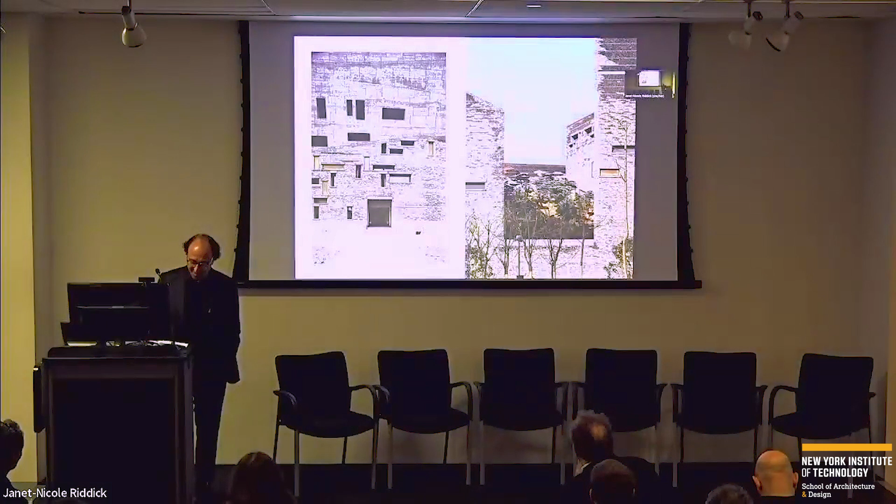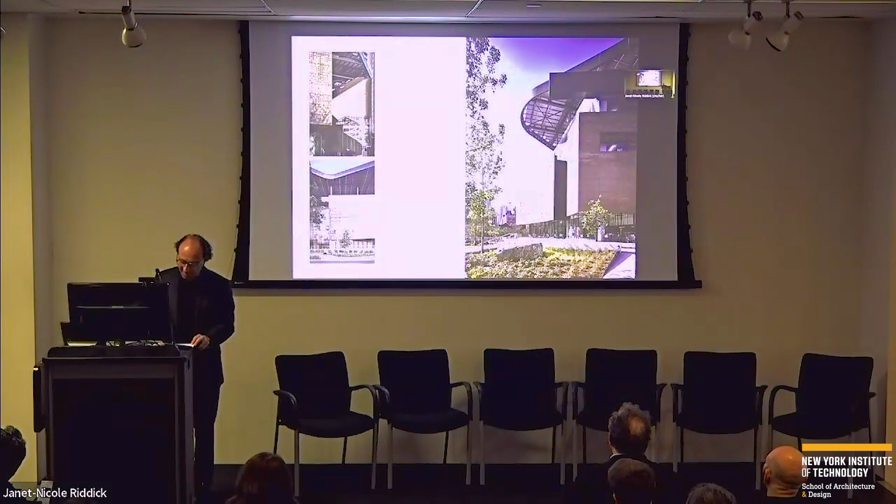We're grateful for Jesse Reiser to be here today, and also Scott Lee to present 2 of the projects. Here's the second of those projects, the Bloomberg Center in Cornell Tech. It's a building I've probably taken the most photos of, of any building in New York, because I live in Roosevelt Island and spend a lot of time walking past it, admiring the coloration and different sorts of conditions of light. I'm sure, Scott, you'll be talking about that. We're close to the... There we are.

Just a quote from a book review that was written by Katharine Logan in the Architectural Record: if you could invite 21 of today's most brilliant architects to dinner, who would they be? And if you seated each luminary between a pair of architecture students primed on one of the architect's most significant works, what conversations might you overhear? Short of actually holding that imaginary gathering, Beyond the Envelope is as close as most of us will get. Beyond the Envelope represents a significant contribution of first-hand accounts of some of the century's more compelling architecture, its ideas and processes, and it goes on.

And instead of that imaginary dinner party, consider this book as an invitation to take your lunch to a park or order a glass of red at your neighborhood haunt. I think of it more as a whiskey book, personally. Yeah. You can order a glass of red and dip into a rich conversation.

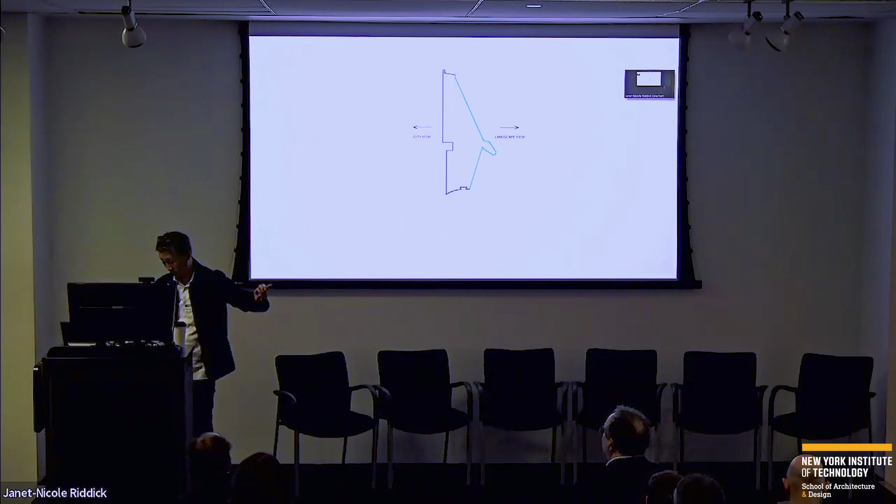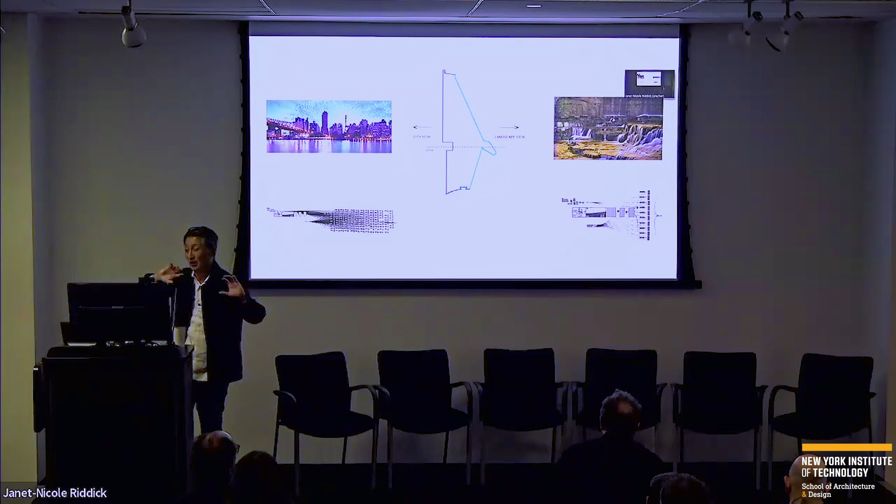The city view, we took an image of Manhattan as you see it from the actual location. The landscape view is, Ithaca is gorgeous, right? Ithaca is all about the creeks. It's about the little waterfalls. We took an image of the gorges. We translated that into a black and white image. Then the scripting command then alternated that to codify the panel.

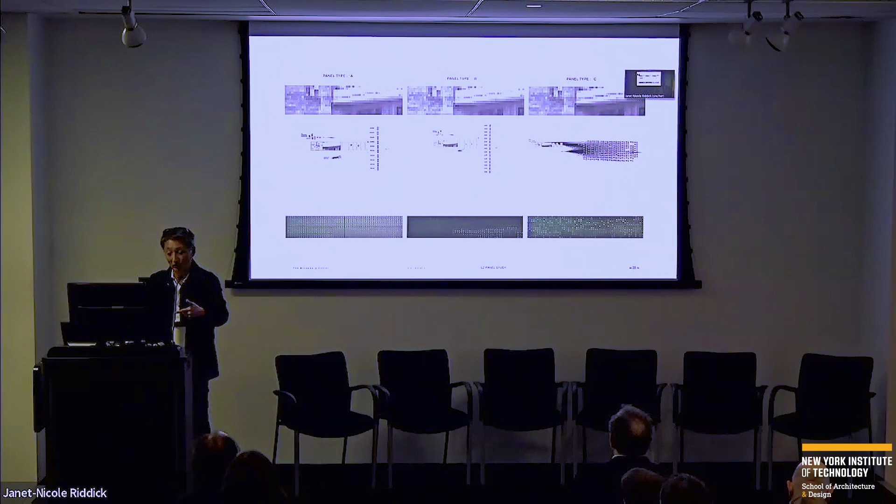And essentially, it's a pixelation. Depending on the grayscale, it will tilt the little pixel and then turn it into the panel, okay? So you cannot see the image literally, but if you had the photo and you look at it, you could see the patterns of the image in grayscale with the relationship with the actual pixelation, okay?

This is at Zahner. These two gentlemen here are Zahner project managers working through the series of different mockups. You can see how much the different photographs affect the grain. So this was the Ithaca photo side. This was the New York City side. And we took one that was sort of in between because we wanted to see the quality of the intensity. Is it going to really kind of wig you out when you see all these patterns? We wanted to prove that. So there were a lot of these mockups.

Looking at daylighting, kind of monitoring how light behaves. We kind of figured it out. We really felt good about it. And then we said, okay, how do you build that at scale? We just need like 6,000 panels now, right? Like, how do we actually do that? So it was all hands on deck on using a robot to actually begin to turn all of those little things.

So the wonderful 20-second story on this one was Zahner, which is the metal fabricator in Kansas City. They were trying to figure out, we definitely need a robot. We can't do this manually, obviously. You know what? We have this old welding robot arm that nobody uses. It's collecting dust. It's in a closet. Let's fire that baby up. Let's print a 3D printed head that's kind of like a nozzle. Let's get the old dog and retrain him and maybe see what he's going to do.

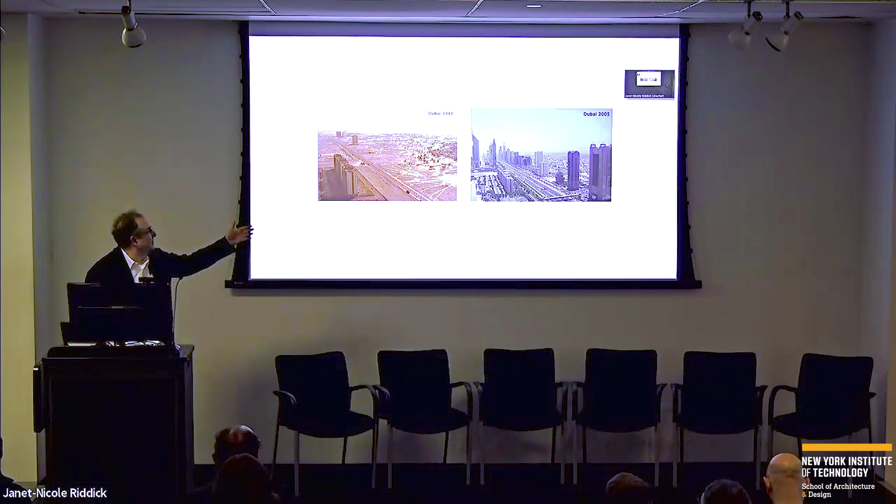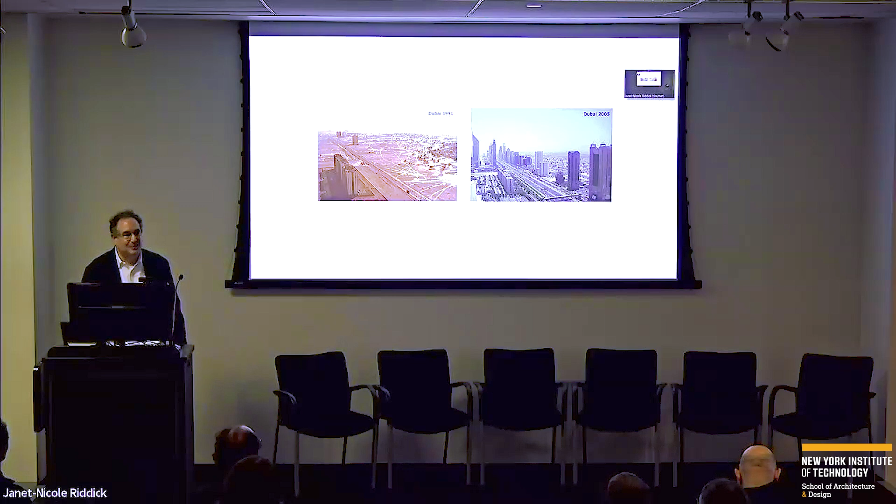We had the opportunity to become involved in a major competition in Dubai for a new kind of business center in a place called Business Bay. And this, again, is kind of old, but you can see the almost tabula rasa condition in 91 and where Dubai was in 2005. I apologize, I don't have contemporary images, so this is like 20 years ago.

But anyway, there were enormous numbers of master plans generated for the various sub-cities within Dubai. This is Business Bay. I think it was one of the large kind of British engineering companies that did the master plan for this.

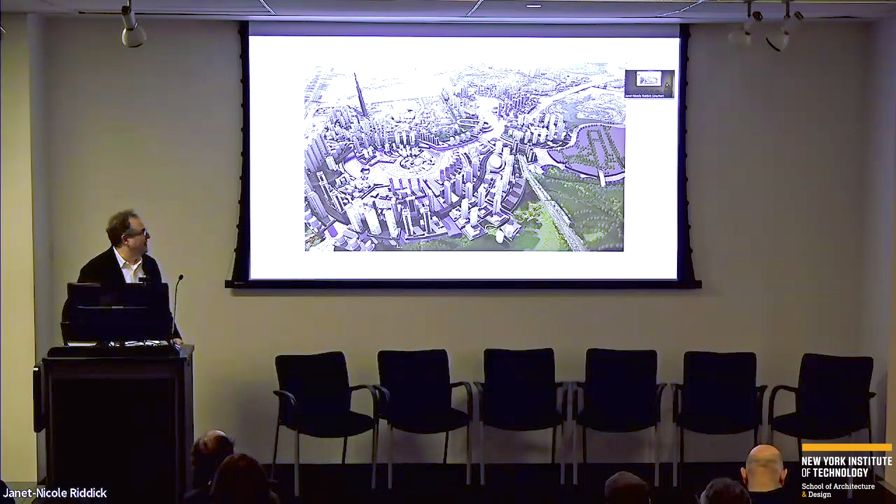And a young developer who worked with a company called Dubai Properties, Shahab Lutfi, created this competition to look at, you see, within the center of the circle, they wanted a kind of central building for Business Bay for stock trading and various other kinds of office functions. And so that was the theme of the competition that got us involved in the project.

When we got to the site, this is what we encountered. That little red flag was to be the center of the circle. So just an amazing sort of contrast between the ambitions of the renderings versus the state of the site. Of course, that's changed. OMA was involved. They were among the people

competing. And they already kind of developed a sort of propaganda campaign prior to the submission of the works. And I guess they included work that they thought the other architects competing would have produced. So for us, they didn't really know. So it was the United Architects, our collaborative tower, but then Thom Mayne and various other architects, Zaha, to kind of show what he would probably consider to be somewhat exuberant and maybe ridiculous formalism that was going on at the time.

And then these were ultimately the projects submitted: the OMA tower, which was a kind of sliver that rotated on a central axis. Zaha Hadid's dancing towers, which ultimately won the competition. Morphosis's Burj Al Maidan, which Thom sent me much later. He was very reluctant to show me that.

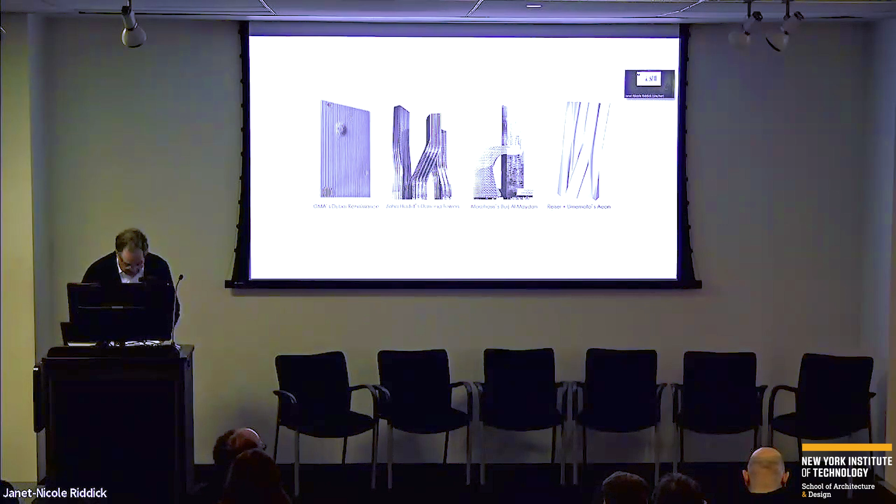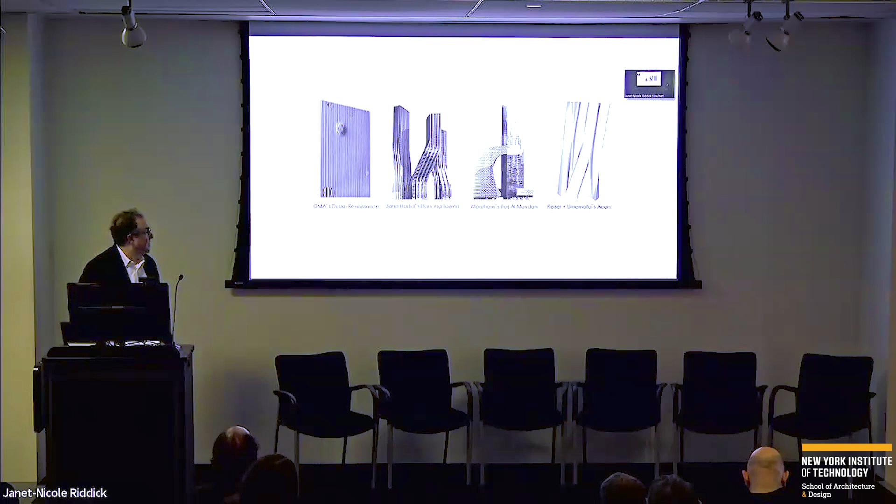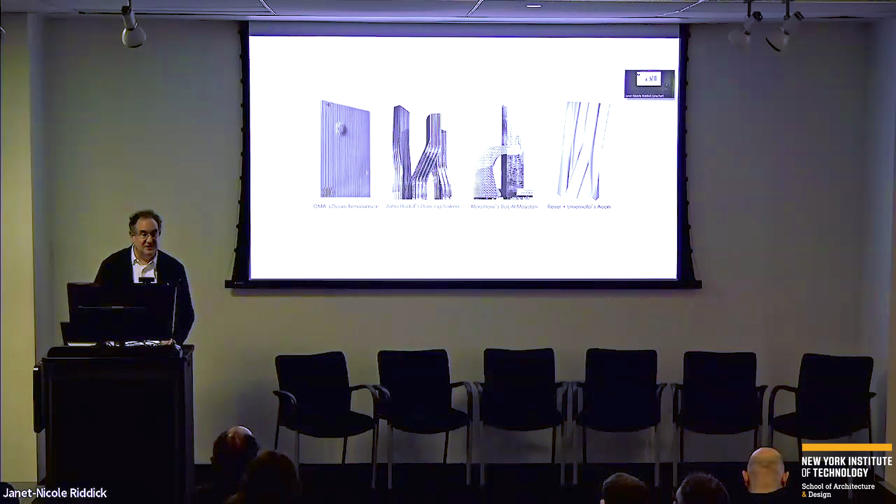And then our project. This was for an 84-story mixed-use tower. So half of it would be office, half residential. And it was to contain all of these civic functions as well as a stock exchange. So it was a huge 84-story project. We didn't win. Shahab Lutfi was impressed with our scheme, and he at that point was about to start his own development company. So he asked us to submit a design for his first project.

And what he wanted, in effect, he loved the formal development of the 84-story tower, and then asked us somehow to incorporate that kind of development in a 22-story mixed-use building. So we went through, I believe, at least 16 iterations, which really didn't work. The project was mixed use, so at the beginning of this project, residential and office at the base, and then it would break into separate sub towers for residential.

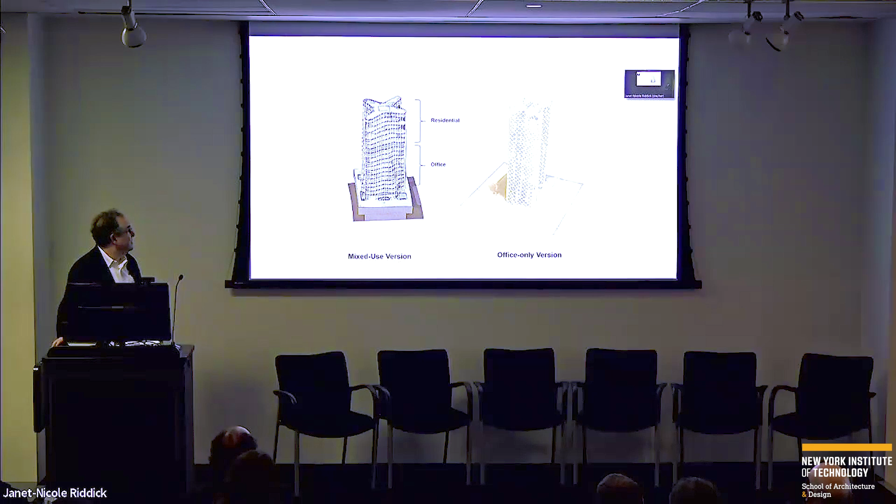We finally did a first concentrated iteration for the mixed-use version with a curtain wall, and it started as a more amorphic base, maybe like an Aalto vase, and then developed into a soft cruciform. Ultimately, Shahab jettisoned the residential component, and we went entirely to office only. We, at the same time, could convince Shahab that those overly developed forms from the 84-story building could simply not work.

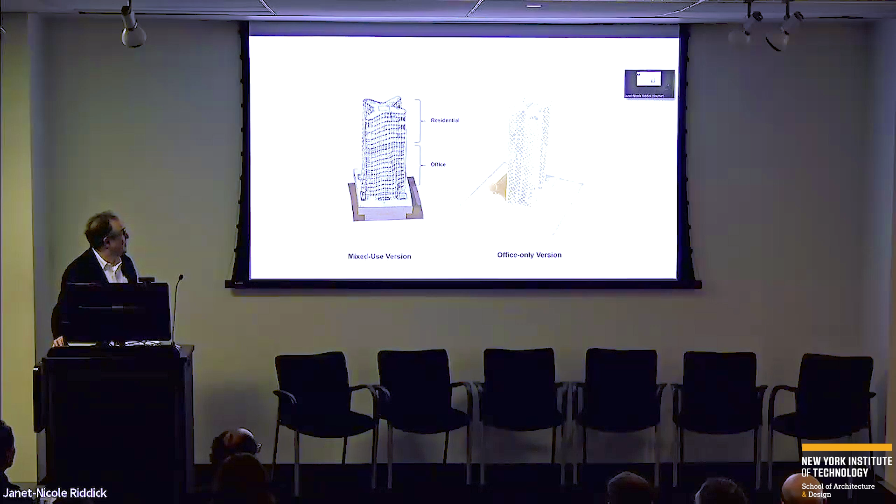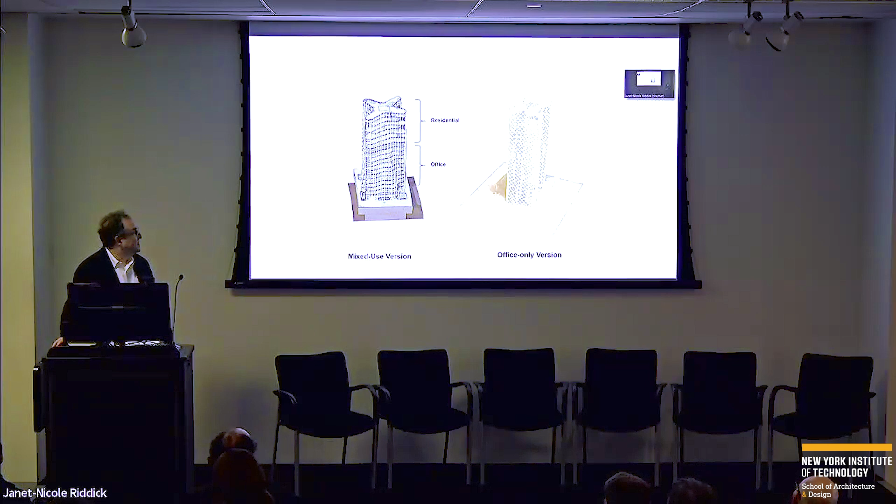So we decided on a cruciform plan, and then also voiced our objection to what we saw as a standard response from foreign architects in Dubai. And at that point, it was always wrap the building in a curtain wall. So that suddenly opened up a lot of really interesting possibilities for us. A bit of a detour.

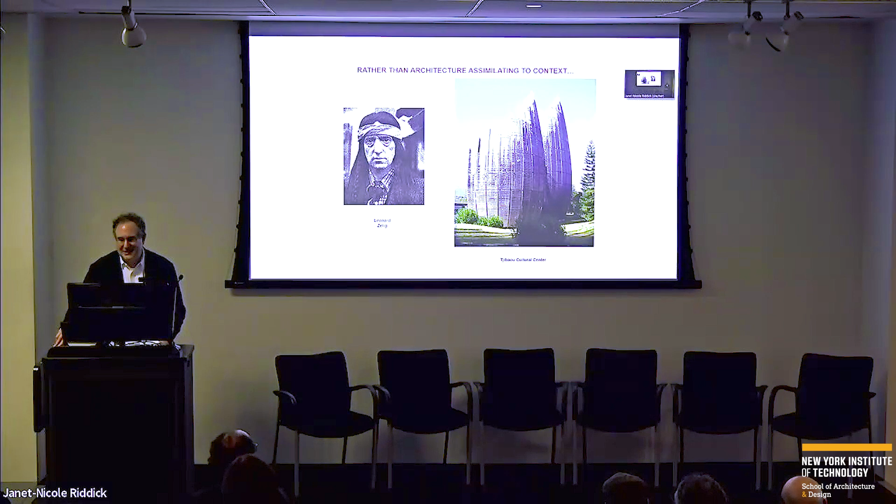And another kind of cultural idea would be that we wouldn't want this issue of context or trying to produce something local. We didn't want to go the Zelig route, almost the work of a foreigner trying to do local context, as in this cultural center, but rather another comedian, Chance the Gardener, who basically people read their own meanings into, even though he was really just a simple gardener.

So, rather than making obvious references to the local culture, we do find, though, that the development of reticulated structures crosses cultures. So there's a kind of slippery way of working, using the notion of a reticulated structure that might resonate at some level to any local. And even, you know, there were basket weave aircraft like the Wellington, which is one of my favorites. Equally, also, biological form, bone.

There's an essay that Sanford Kwinter wrote about the lacuno-canalicular development of living bone. That really interested us too, that it wasn't about a mechanical diagrid, but that it was highly varied and could be influenced at will, both for functional but also for aesthetic reasons. And other people have pointed out that there are resonances as well to Melnikov's house, which I love.

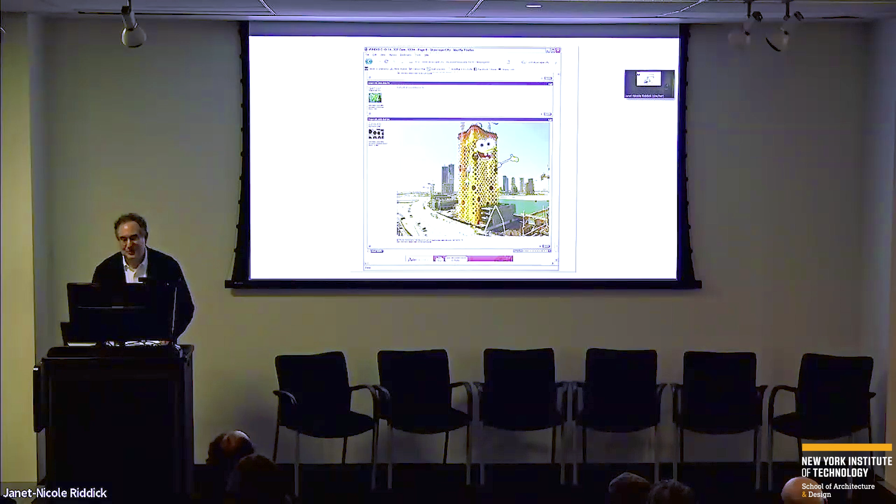And then again, we find ourselves in an interesting in-between space where, in a way, there's an aesthetic dimension to the look of the thing, like a cosmetic, but at the same time, it has a performance dimension as well. And then there are all kinds of interpretations that we don't need to put on it, but this is what happens.

Another thing that was of great interest to me, because I spent a year in Rome many, many years ago at the Academy, was the strangeness of the pyramid in Rome, where you really didn't know, especially on a smoggy day, how big that pyramid was. It ended up being relatively small, the Pyramid of Cestius, I believe. But from certain distances, it appeared immense.

And so we were very interested as well in defeating easy readings of scale in the tower. And that also motivated the variation, much like the variation of features you would see in this toad. So there was the challenge then of dealing with the regularity of the floor plates and their heights, and then how a highly variable facade would intersect them.

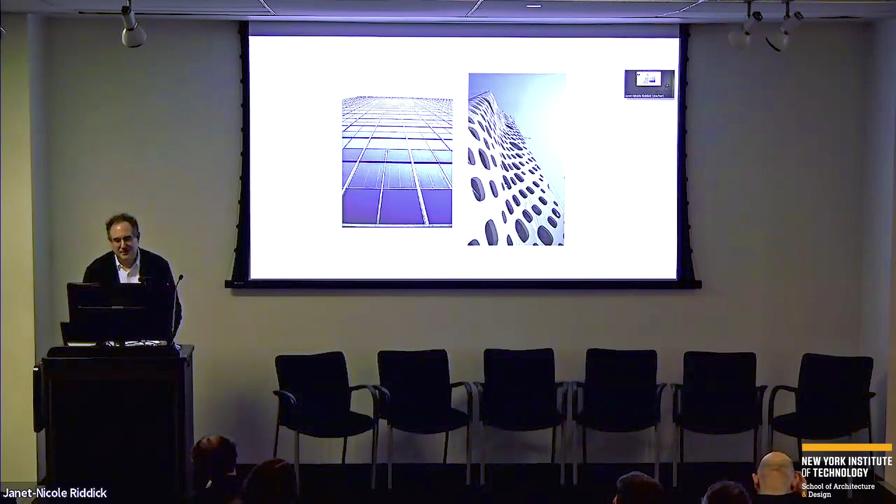And we were, again, interested in the aesthetic dimension coming out of op art, where, because of the vacillations and the contractions, you had a strange feeling of movement or potential movement when you got up close, especially in the oblique, that you couldn't really read where the floors were, that's for sure.

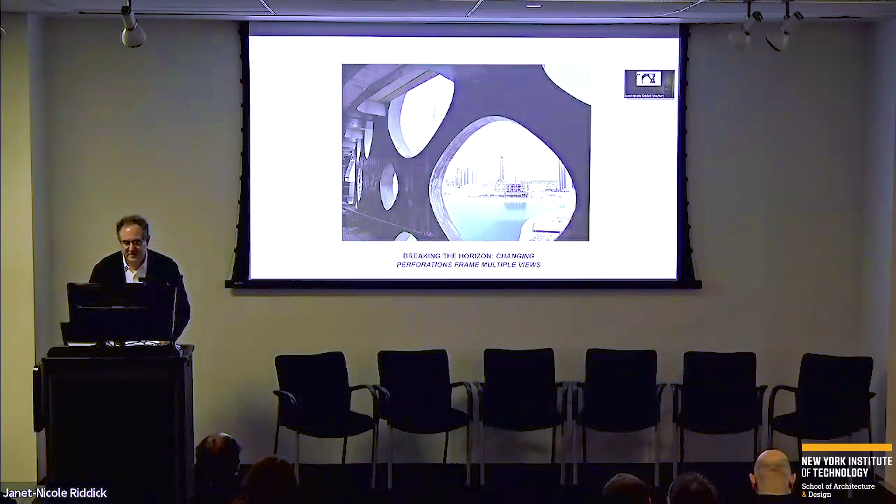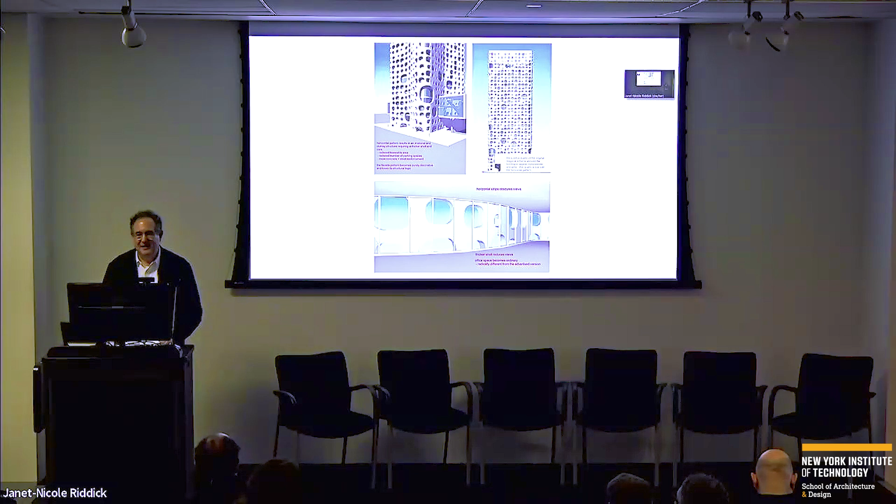Multiple views, breaking horizons. There was an unfortunate, and thank God we got through this, debate with the builder who wanted to turn the diagrid horizontal. So you would get, I guess, a kind of Vierendeel, but it lost all its dynamism, and we fought like hell and succeeded in not having that happen.

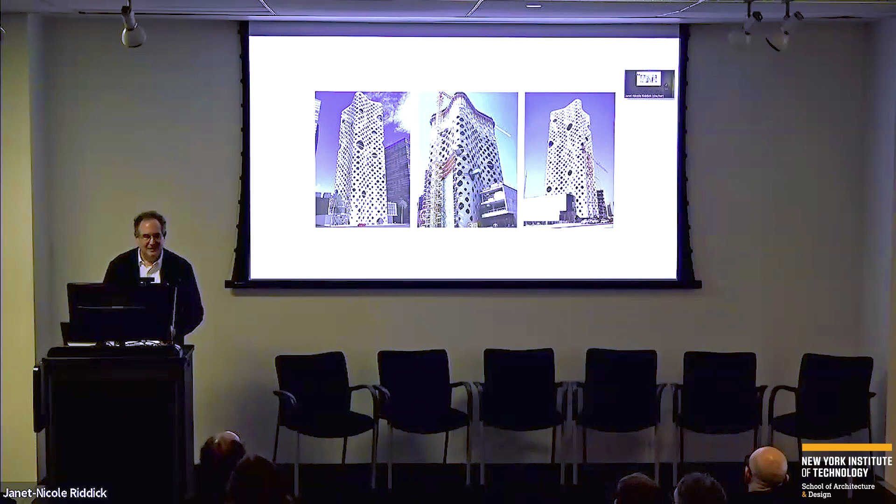But also the uncanny kind of relationship at that time, I think probably less so today, because renderings of this type were first coming onto the scene, the strange relation between the rendered object and then the kind of notion of a built rendering.

And this is something important to me to talk about tonight, because I fear that there's also a kind of positivism related to this kind of work, which people put forward as arguments to justify the work. But in fact, even with all the parameters, we had a lot of freedom to work with the placement of the holes.

And in fact, there was also an abandonment at that point of a scripted version of holes. We had an Australian architect, Roland Snooks, in the office, who did amazing work automating the drawing sets and so forth. And then he wanted to help us by automating the scripting of the gradients of the holes.

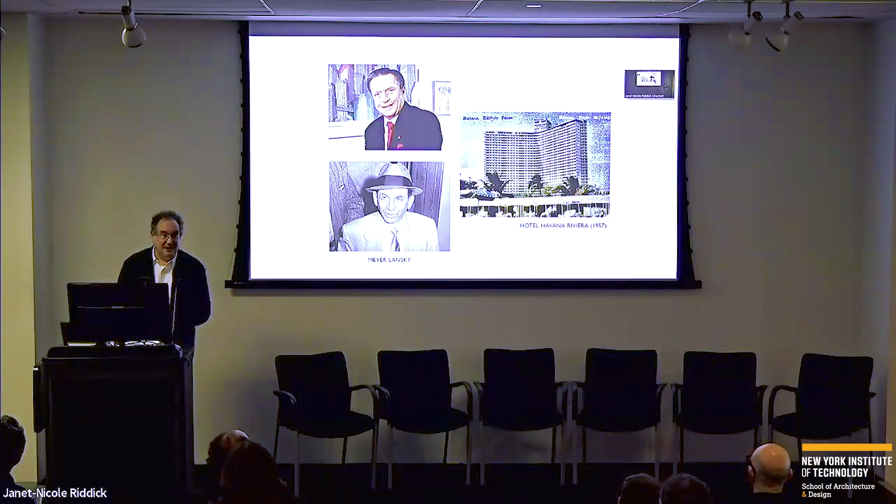A quick detour, I hope I'm not boring you, but our structural engineer, Ysrael Seinuk, was our teacher for 4 years at the Cooper Union. He was an amazing teacher and designer, but he also had an incredible history. He worked with the mafia boss Meyer Lansky in Cuba to do a series of the most famous modernist hotels before the collapse of the Batista regime. And then he came to America.

Yeah, he's also Hyman Roth, if you've seen Godfather 2, is Meyer Lansky.

He came to America and continued with some well-known figures who I won't even mention, and designed the building across the street. They kind of converted that. But he was an incredibly dynamic character. He really sold the O-14 Tower, not us, to the lineup of sheiks.

The other conversation I had with Guy Nordenson, because he was working with Steven Holl at the time, and he was my colleague at Princeton, was that in order to really get beautiful castings, it should all be precast. And I said, well, we want this to be an exoskeleton. So, well, you can do moment connections and it will function as an exoskeleton.

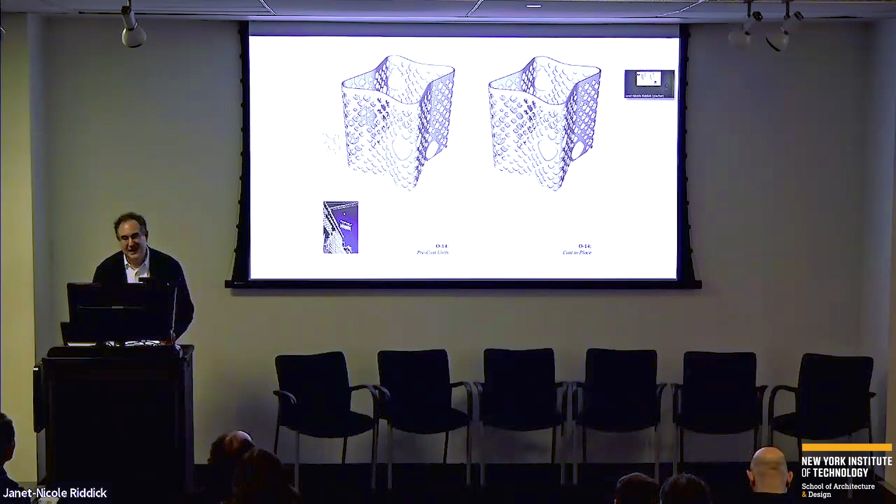And that's another principle, as an architect, I make the decision: yes, both will perform, but the precast will have seams, and so it will look like there are columns behind it. So I don't really buy into pure performance-based arguments either, because there are other cultural things going on, or even just what people imagine they see, that equally fit into the architectural questions.

So it's a 22-story office tower, no columns. There is a gap of 1 meter between an interior window wall, not a curtain wall, which just goes from slab to slab.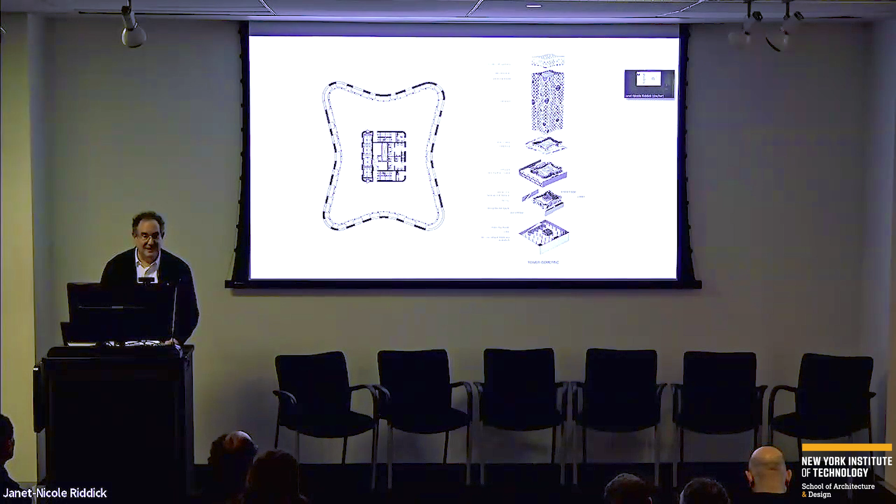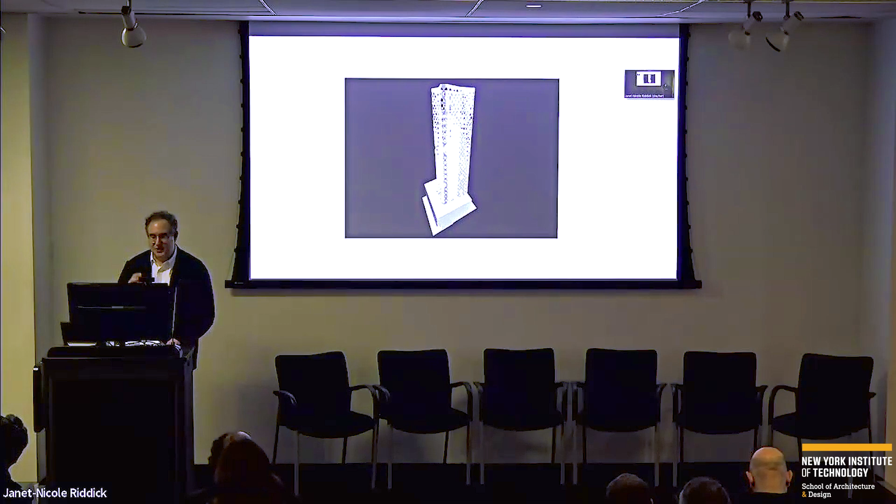And then the outer concrete shell. The meter gap was originally for the window cleaning, so you could clean the window wall. So notionally, this is not real, but the columns move out of the normative tower and then spread and become an external shell. Seinuk described its performance as a shell similar to a reactor cooling tower. It would be very strong, and it would allow the core to become fairly light because it could take all the lateral forces as well.

This is an isometric of, I guess, the 4th level. The shell goes from, I think, 600 millimeters to 400. And so there's a really interesting detail, which you might be able to see, around the holes going from one thickness to the other. We originally had it as a taper, but it would have been prohibitively expensive to cast that way.

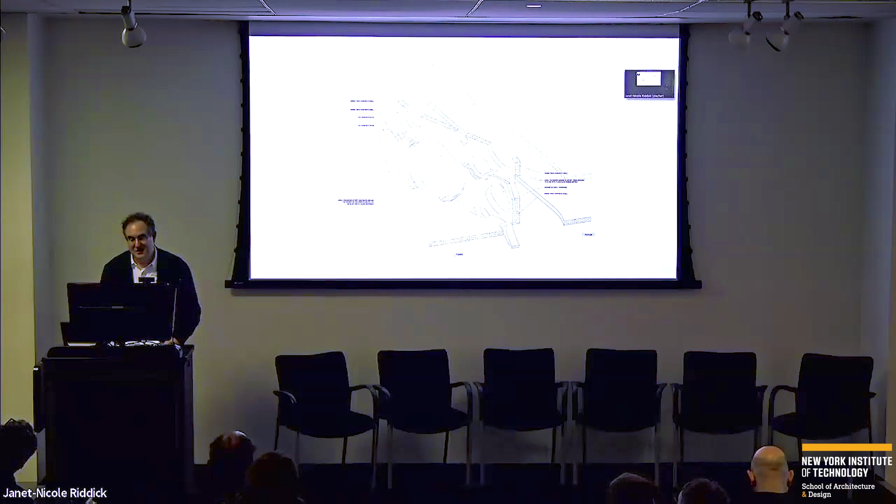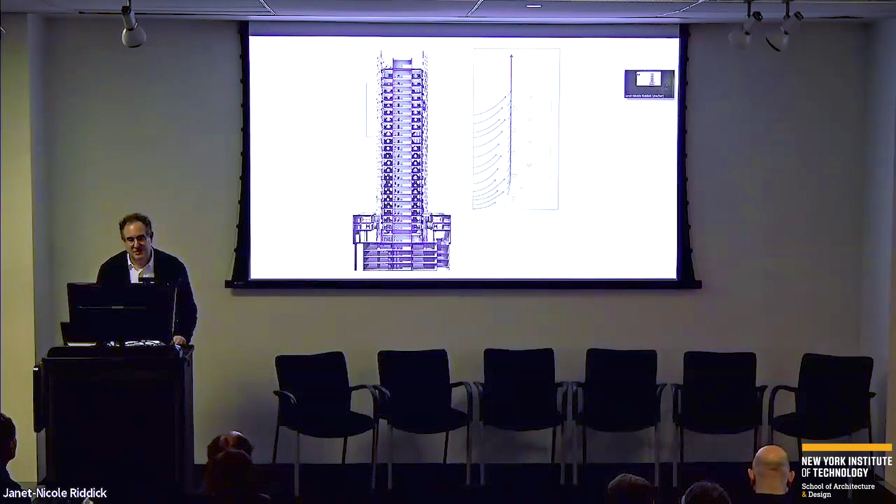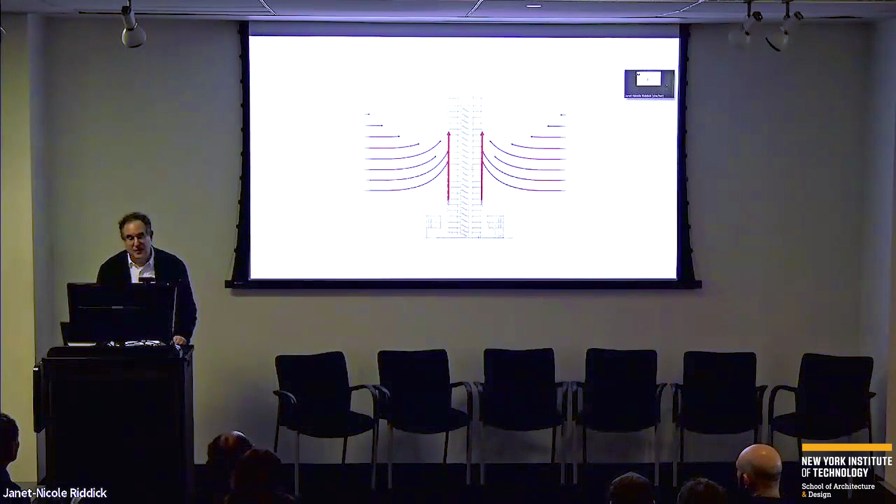So anyway, as a result of the 1 meter gap, you get a stack effect, which we were told by our MEP engineers would reduce cooling costs in the range of 30%. And this is the gap from below. And then an animation of how that works. I forgot to bring the film, but there is a film of an exercise club that uses the space underneath O14 because there's a continuous breeze actually generated by the building under there. And it's pretty hot and muggy in July.

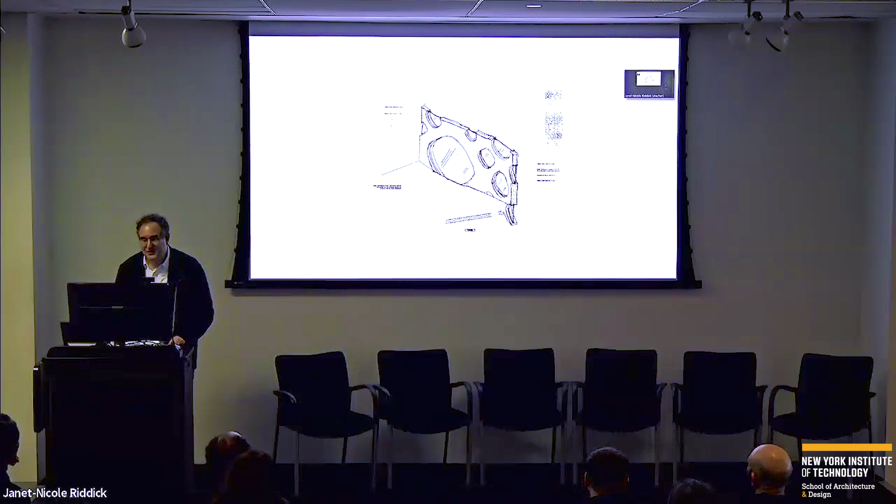So I want to circle back again and talk about the development of this whole section of this envelope. In the beginning, we studied putting glass right in the holes. And we came to realize, both because of cost considerations and aesthetics, that because you would get these thick frames, there would be costly issues about doing neat glazing. It was something I just didn't want to do. And so this gap, separating interior and exterior, came about as a result of an aesthetic problem and cost problem rather than from the beginning a sustainability problem.

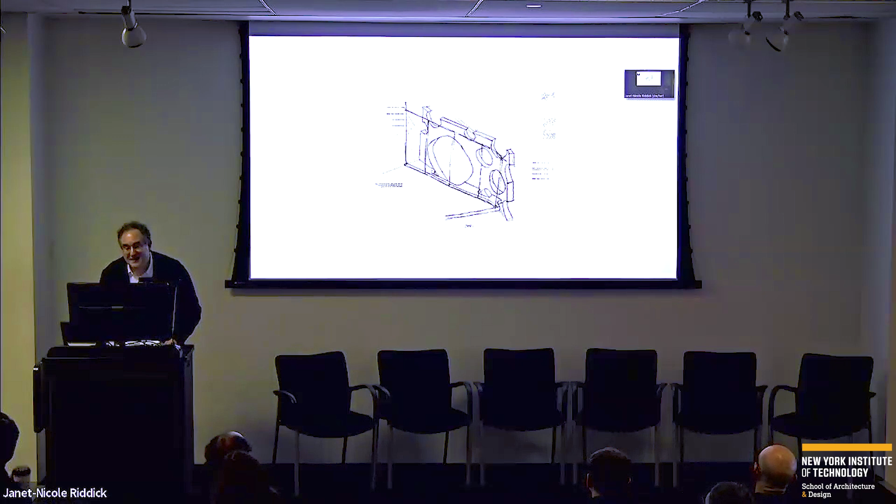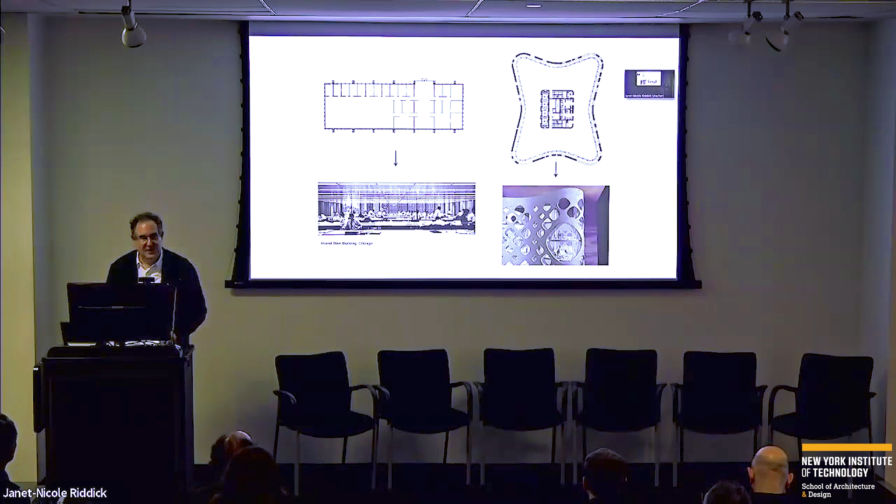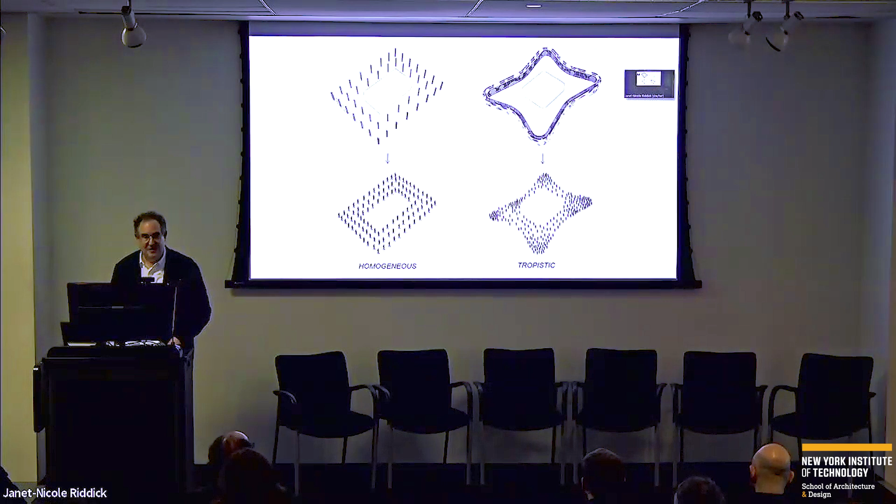The other thing that we were arguing with the client, not as a bad thing, was that this would be a very different kind of office tower. The Inland Steel building, which I love, still in the 60s, was much more about regulating, storing and processing paper, and the O14 building ideally could be much freer in its plan because you didn't have all of that paper storage anymore, and people could move about, so they wouldn't be in the George Tooker hell, but rather you could organize desks on an open work floor according to preferences about light and dark. And since the envelope varied, there would be a different way of thinking about organizing.

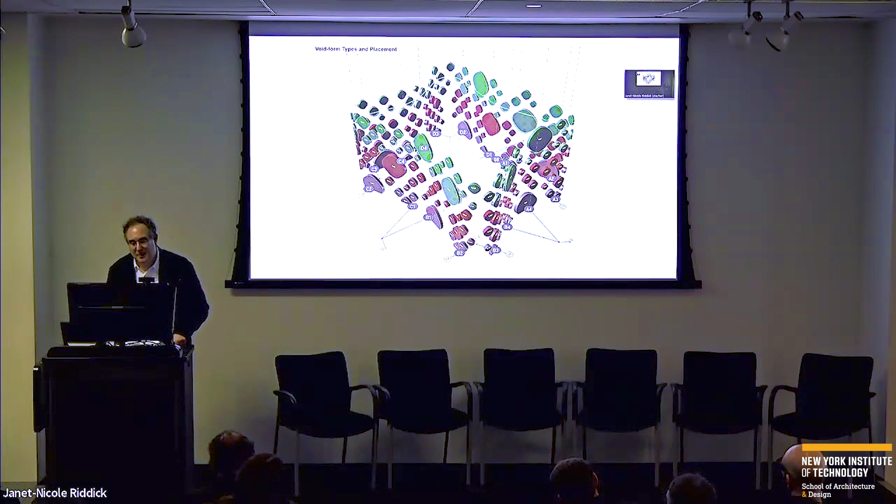We also went through a lot of work trying to rationalize the formwork for the building, the 5 different scales of holes, many of which didn't fall on flat surfaces, or were partially crawling over curves. So it was very challenging. We did an exercise as well, early on, trying to argue for standardized molds to reduce the number of molds. Ultimately, it went to the Beijing Formwork Company. They decided not to do reusable molds. These were all waste molds. They were all automated wire cut on site and then broken out of the cast.

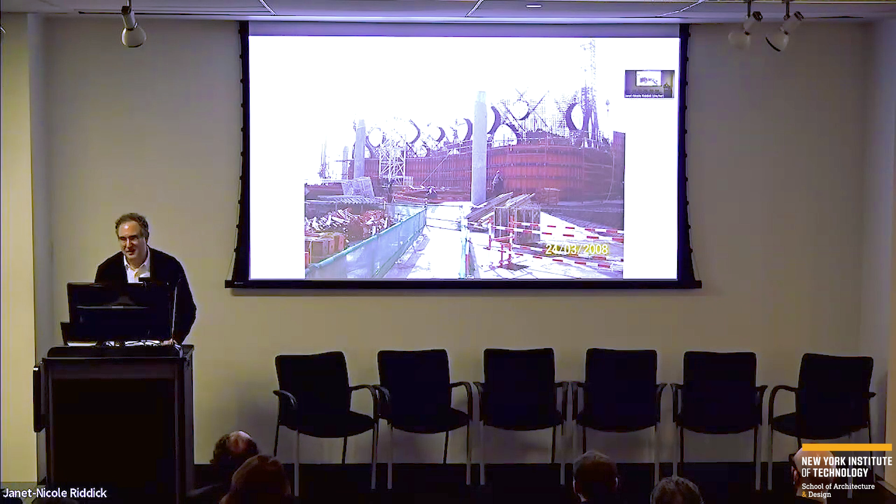And it was really a learning process because on the first levels, these foam molds, especially at the bottom of the pour, began being compressed, and so they began deforming. You're seeing the second level. At that point, they put melamine strapping around those foam forms, and they would resist the pressure of the concrete. So the bottom is much more handmade looking. They had to grind back manually. Some of them are really funny. But as we went up, it took less and less time to pour a floor. Still, I'm sure, slower than most conventional buildings. And then this is the shell as it emerges off the roof.

Yeah, I can just flick through. I've been going way too long. Some images.

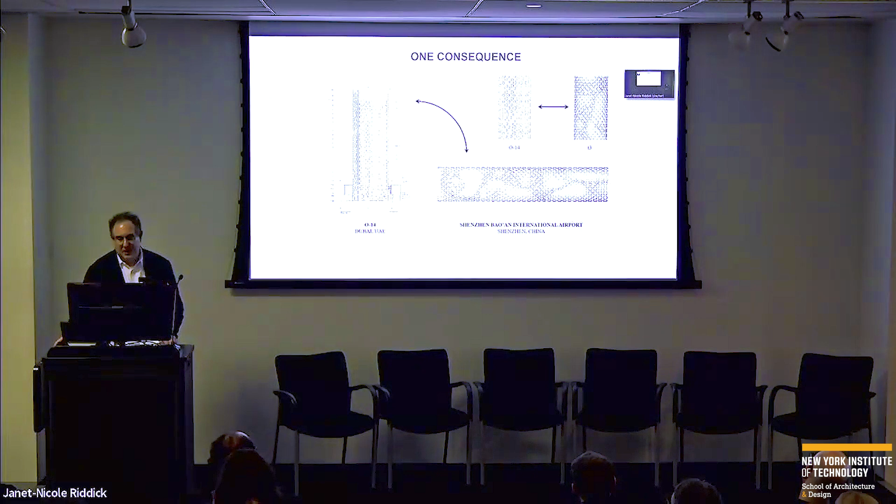And one last thing. The trajectory of the work, because we carry these concepts through to other projects: we took what we learned from the O14 project, and when we were invited to the Shenzhen airport competition, basically turned that concept on its side, worked with a big vault, and then added the complication and variation that instead of the holes being normal to the concrete shell surface, they inclined and could produce different atmospheres and also sight lines within the airport. So it continued.

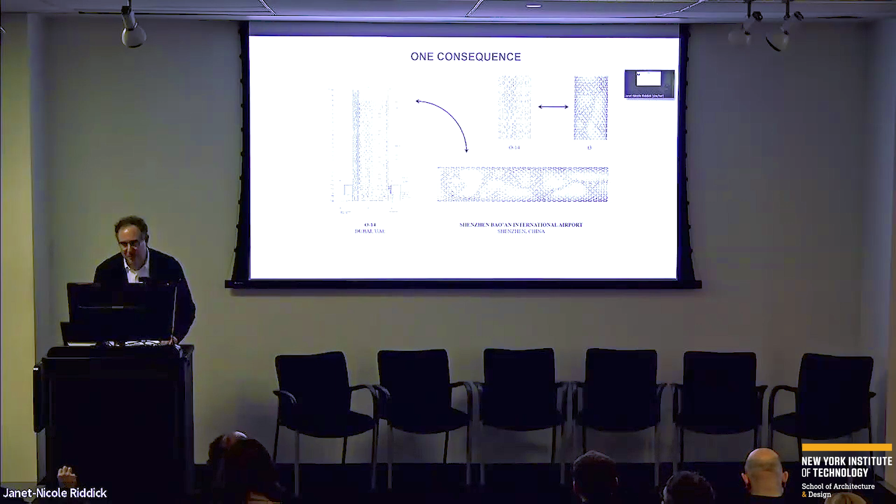And then there was another tower for Mexico City, which we also made a proposal for. So that concludes my part of it.

Maybe I'm gonna start again. Once again, thank you so much for amazing presentations and definitely going a little bit further than we went in the book and presentation that was during the interview. And first, maybe before that, I have a small digression: I would like to emphasize that, in my opinion, the greatest buildings one can recognize by the amount of thought put behind every detail. In both presentations, we could see the spectacular interconnectedness and relationship between the envelope, interior, user experience, and environment.

And going to that, I would like to ask you, Jesse, since 2010, there's been a significant shift in building technology and climate responsive architecture. If you were to design the O14 today, considering the latest advancements in these areas, what improvements or innovations might you incorporate? Something with AI, maybe? Well, I think one of the things that wasn't so much in discussion then was